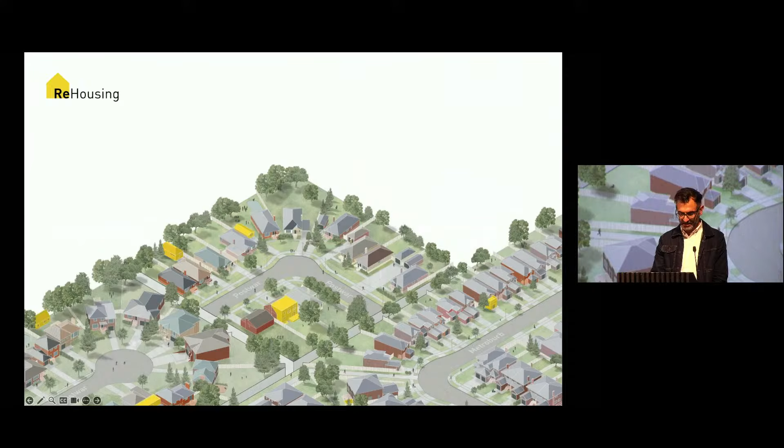As a kind of primer, zoning rules in North America are changing to allow new forms of multi-unit housing in single-family neighborhoods. As architects and urban designers, we were able to take advantage of these rules.

Our ability to assess property and steer our own small projects through design, approvals, and construction provided a starting point for a lot of the conversations we had when we were first getting going with this project. Specifically, the idea that as designers who were able to renovate our own basements, or think about buying a lot where they could do a small apartment or create their own multiplex condominium, we felt like this knowledge was something we'd be able to share with others—non-professionals seeking to do similar kinds of work.

This could range from homeowners adding a unit to improve affordability, to small builders and nonprofits growing their capacity for larger, more complex projects. The overarching goal is a belief that a more diverse building industry will yield a broader mix of housing better suited to the varied needs of local constituents.

Aesthetically, we're interested in how this expanded agency, a broader class of citizen developer, might lead to a more heterogeneous and fine-grained built environment, something Robert mentioned when introducing us. So this is a vision for a city region shaped by many small acts of building, though it will not be easily realized in North America, as here we are used to building big.

To understand why this is a challenge, it helps to look at where this culture of bigness comes from and how it impacts our capacity to build small.

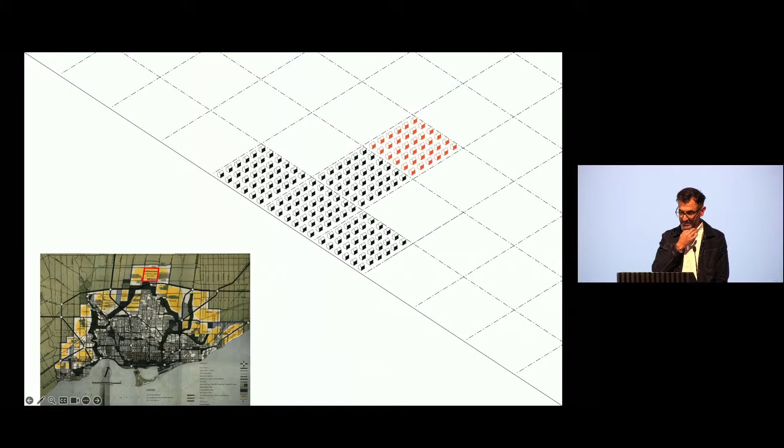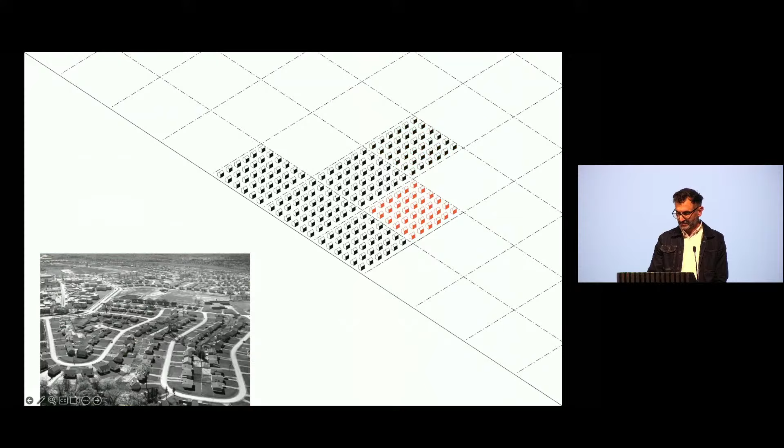These yellow blobs indicated are new block subdivisions to house upwards of 50,000 people. These subdivisions, or neighborhood units as they're called, are rubber-stamped across the urban region at an unprecedented scale over the 20th century, until we almost filled the region up.

This happens in spite of the fact that from about 1980 to 2006, as you're seeing here, there was a drastic lull in regional planning.

So in 2006, the effort to plan the region was rekindled, aligning with global trends, in an effort to reinvigorate and rethink the region at this time. One goal of this authority was to build out urban cores. This is the growth plan for the region that was developed in 2006.

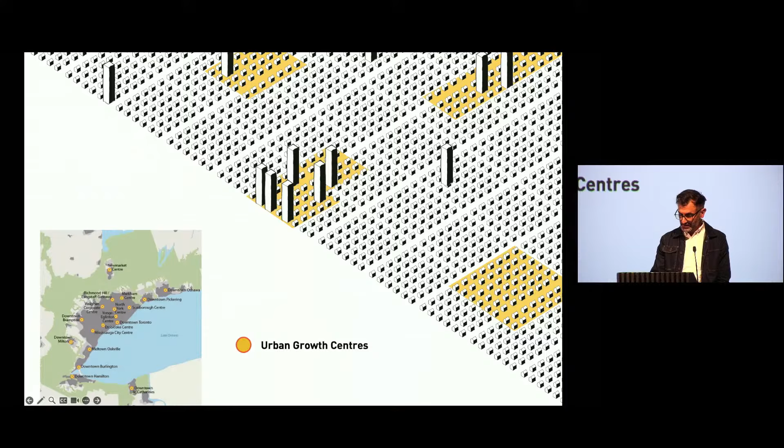The plan pushed new development into growth centers across the region's varied municipalities, including downtown cores and suburban centers. To my knowledge, the scale and enforceability of this planning regime is unmatched in North America.

I remember reaching out to my best friend, who's the boss of zoning in New York City, and I showed him what's happening in Toronto in the 2010s, and he was blown away at the scale of regional planning happening here. It got me thinking about how that affects how we build, and the attitude to making cities, and how distinct it was from any place I'd lived prior.

And to streamline this mode of construction at this big scale, approvals pathways, financial systems, and professional services are all geared for large-scale builders, of which Toronto has a comparatively few number compared to other cities. And it is within this context of bigness that ideas for building small emerged.

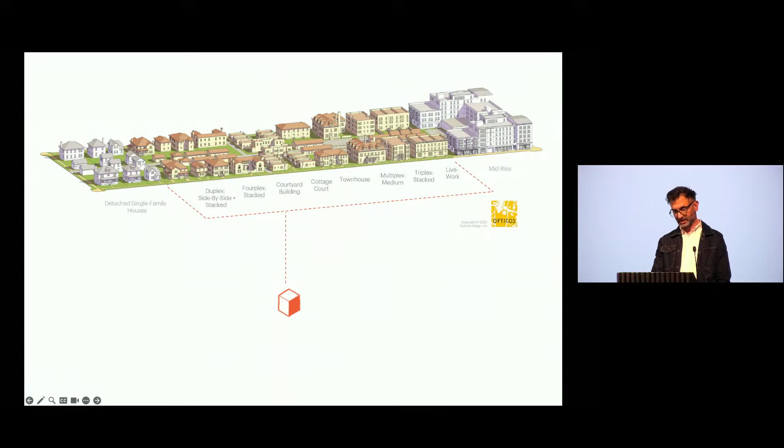In 2018, the city introduced a set of policies meant to open up single-family neighborhoods to multi-unit housing. Broadly speaking, the idea was that instead of continuing to build outward, we should fill in our existing single-family areas, which make up over 40% of the region's land supply. Advocates call this type of building the missing middle, small to mid-sized buildings that can fit on a single lot.

The idea has been widely influential, but uptake has been limited, and it's worth taking a moment to consider why. Viewed from the perspective of form or scale, the missing middle describes a type of housing that is in between low-rise single-family homes and high-rise towers. But a problem with this perspective is that it does not really reflect how we actually build.

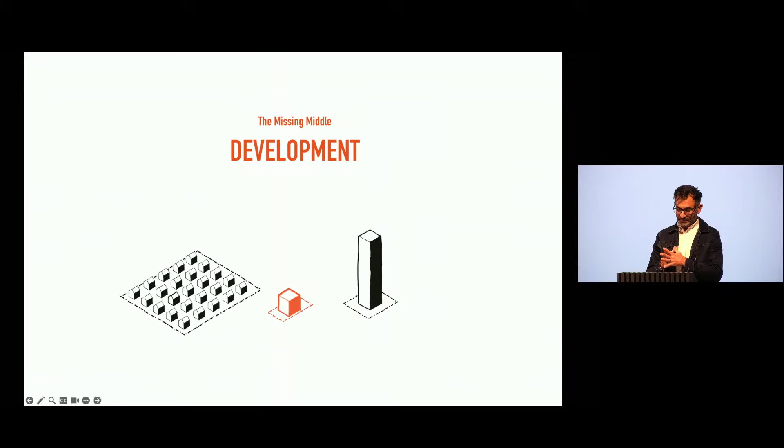One of the reasons I shared some of this history is to provide some context for this. We don't build single-family homes one at a time anymore. Rather, we build these vast subdivisions on one hand and towers on the other. And so when viewed from this perspective, this middle scale is not so much in the middle of our housing types, but rather exists in a kind of feasibility gap.

Bigger projects offer more value to people who finance, design, and build them. These efficiencies, referred to as economies of scale, encourage builders to build big, making it comparatively difficult in this context to build middle-scale infill housing and to realize the kind of ambitions of incremental infill that it promises.

So it is in this context, where both institutions and industry push housing to larger scales, that we believe it is important to rethink housing design if indeed we are interested in expanding the smaller to medium scale of our built form. And so I'll share a few ideas about what I think needs to be considered in order to do this.

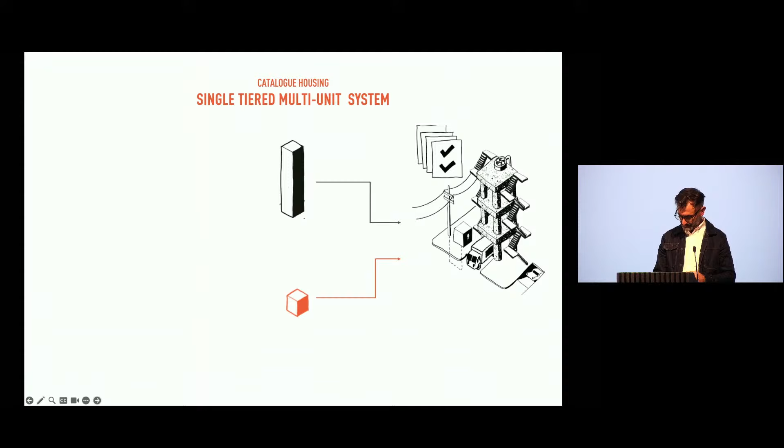One is that medium-sized housing is financed, approved, and built currently like larger projects. So from our perspective, we're currently researching the architectural characteristics of a multi-tiered housing system that provides discrete pathways — formal, technical, logistical, and regulatory — for small to medium-sized projects.

Another idea is to think in many instead of thinking in one. So how to think about buildings not as a singular object, but as a system or typological system of buildings. Our approach to this method is to identify the dimensional limits for basic buildings — the stair configurations, how the units are laid out — and then to align these with parcel widths.

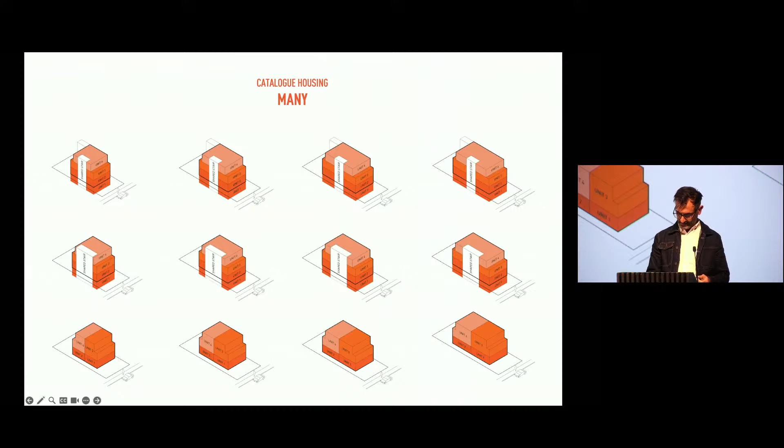And in doing so, focusing on how design as a system of many repeatable iterations can then propagate at large. So this is very much scalable, and supply and building more driven. It falls in line with some of the attitudes of how we're building these days.

A brief caveat to say that we're not speaking explicitly about affordability in this context. There's not an assumption that building more will solve that challenge, but we do think that building more is important.

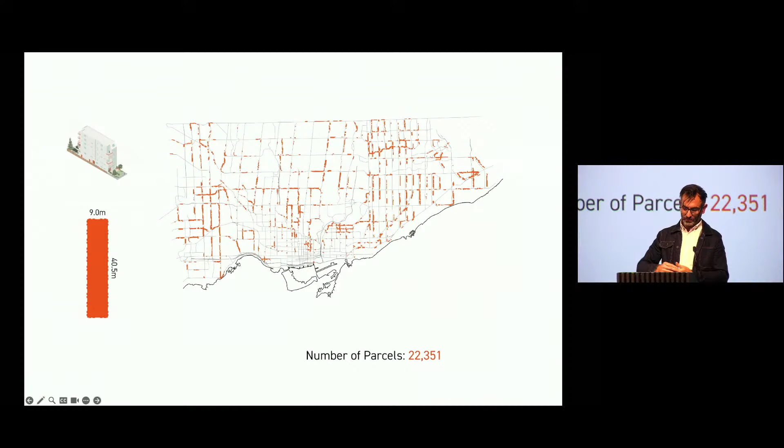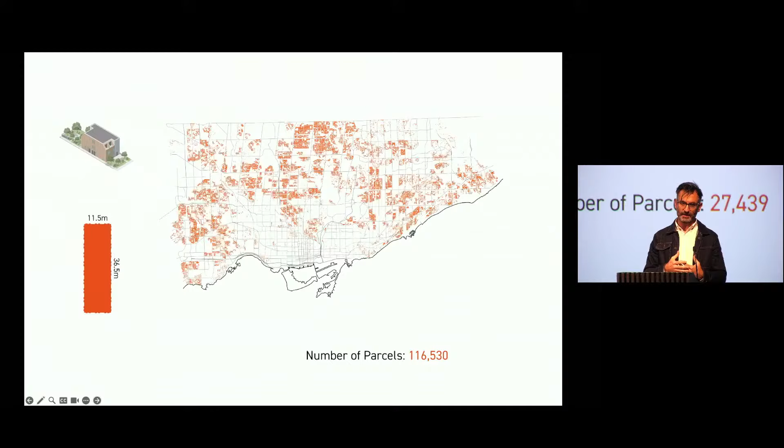So another aspect of this idea of repeatability is to use methods of morphology to map out parcel sizes and the urban structure across the region to understand where different types of buildings can fit. Sam's going to speak a good bit more about this in a second, and we'll revisit this slide to speak more about it.

So with these conditions established, we also work to make buildings that we think look nice. Here are a few examples of the scale that Robert mentioned, and again, Sam's going to speak to this in more detail. In sum, we're interested in such frameworks for housing production that can be deployed across a range of sites, making small, well-considered forms of housing easier to reproduce, adapt, and multiply in different contexts.

And so I'll hand it over to Sam.

Our approach to design research and catalog housing has evolved a lot over the last almost four years that we've been working together, in response to the changing guidelines in our cities, but also a lot of trial and error to try and navigate some of these complex ideas. From our original catalog, which outlined four ways to transform 13 common houses in Toronto from single family to four-unit multiplexes, our research has since expanded to include new build fourplexes, sixplexes, and most recently, small apartment buildings.

Our work on new build 4plexes began with the goal of understanding how the dimensions of a parcel impact the type and size of multiplex that you could build on a site. A key aspect of this work was understanding the impact of different stair configurations on the design and layout of multiplex units, whether a project has stacked townhouse-like units each with their own stair, two shared stairs, a scissor stair, or hopefully soon a single stair.

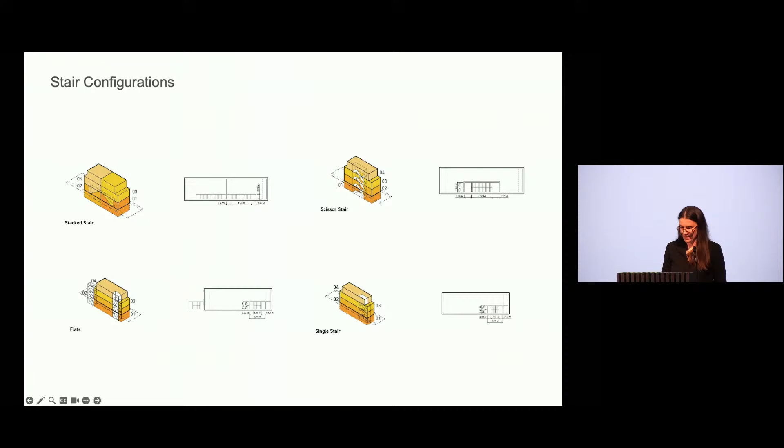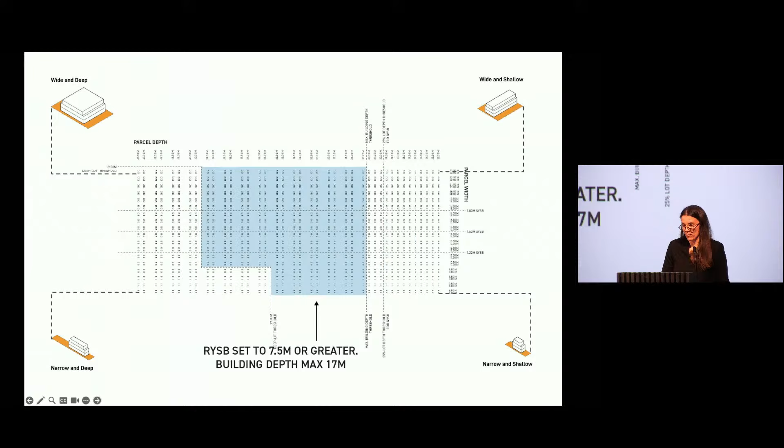Circulation plays a crucial role in organizing the internal space of a multiplex. It affects how units are accessed and how livable space is distributed, and different stair types and orientations work better on different lot sizes. We tested these configurations using a matrix consisting of 1,440 potential lot sizes categorized by width and depth in half-meter increments. This comprehensive grid enabled us to account for the variety of lot sizes found across Toronto's residential neighborhoods.

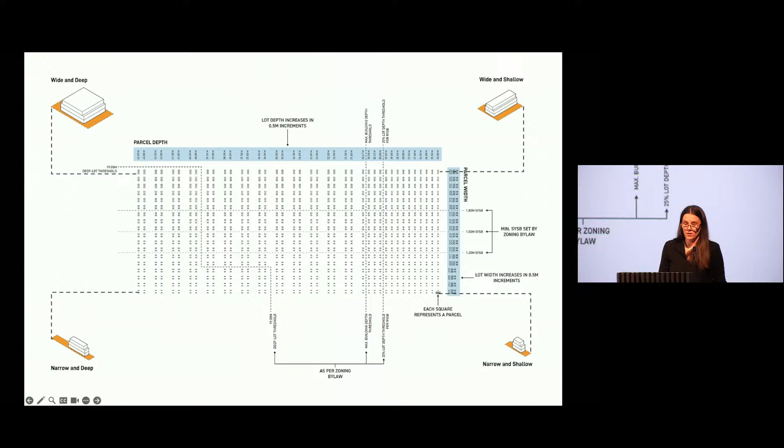Each potential lot size on the matrix was mapped with relevant zoning regulations, including side yard setbacks, rear yard setbacks, maximum building depth, height, and other requirements, in order to determine a maximum building envelope for each. From here, we mapped diagrammatic floor plates of each stair configuration to determine performance boundaries based on unit area.

This mapping established a foundational understanding of which parcels could support different types of fourplexes. The different shades of blue highlight the thresholds where a floor plate is large enough to accommodate different unit sizes, with the bottom showing studio units and the lightest at the top showing four bedrooms.

This process was repeated for different configurations of each stair type to estimate the lot dimensions most compatible with each type. Luckily, our research assistants were more than willing to do this, including taking into account lot coverage percentages, and so they drew diagrams of thousands of multiplexes.

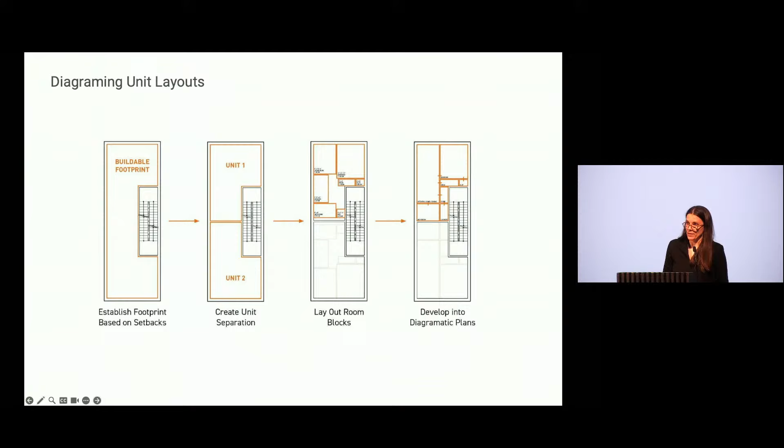From this stage, we transitioned from basic footprints to more detailed, though still high-level diagrams, testing how available space could be used to create functional dwelling units while accommodating realistic room sizes and considerations of circulation.

Again, we identified thresholds, points where small changes in the size of the lot or stair configuration could lead to significant impacts on the overall configuration of the plan and the size of units it could support.

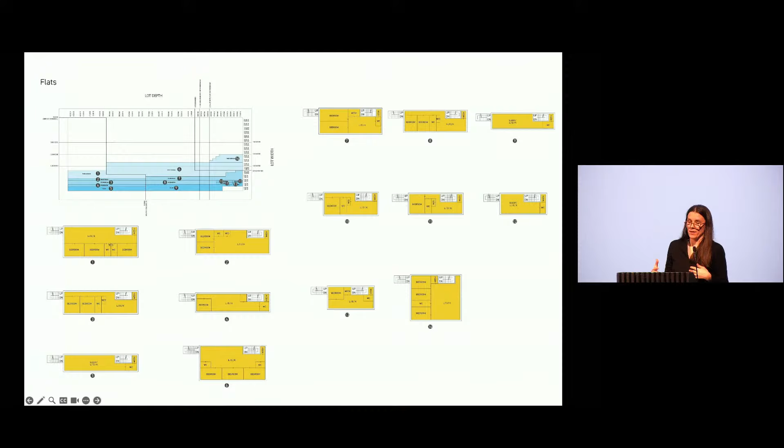Again, here, each shade of blue represents a zone of lot dimensions with a functionally similar layout. For example, a transition might occur when you see a change where the site becomes wide enough that two bedrooms can be accommodated at the front instead of just one.

It was really important for us to demonstrate that these plan diagrams could translate into real buildings, so we selected representative lots from across the city and developed more detailed architectural drawings for each stair configuration. This work was under development as we were considering the viability of pre-approval and in discussions with the city about how complex that is and how to respond to the variety of lot conditions and opportunities presented by the urban fabric.

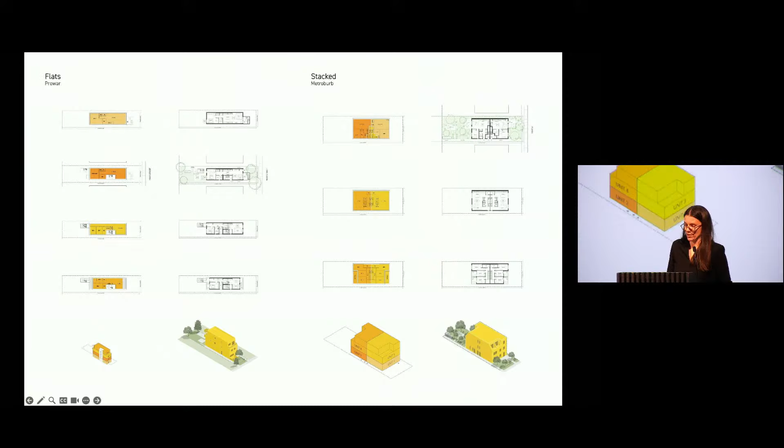Following the passing of the multiplex bylaw, which allowed 4plexes all across the city, City Council requested that the planners consider 6-unit multiplexes within the same envelope. So we were commissioned by the City of Toronto to undertake a study to look at the viability of 6plexes within Ward 23, Scarborough North.

This time, looking to establish thresholds of viability, we took a different approach. Rather than starting with the lot dimensions and understanding what was possible on each lot, which was impossible given the time frame this time, we started with the building. Using the envelope design outlined by the multiplex zoning code and sets of minimum standards that we developed in collaboration with the city, we developed a catalog of diagrammatic configurations for 6plexes at 2-meter wide intervals.

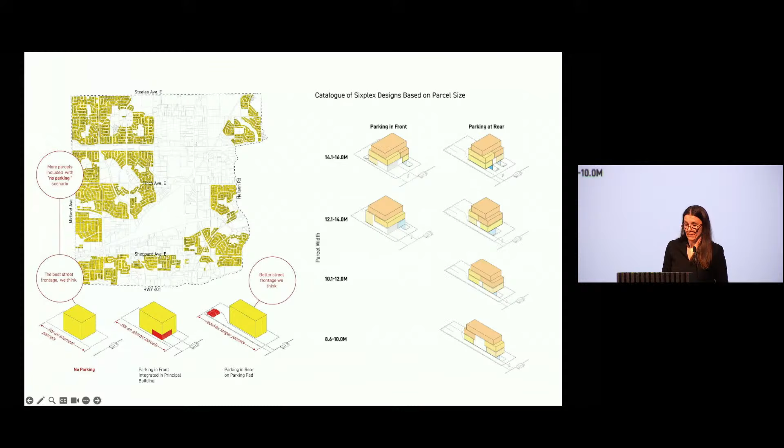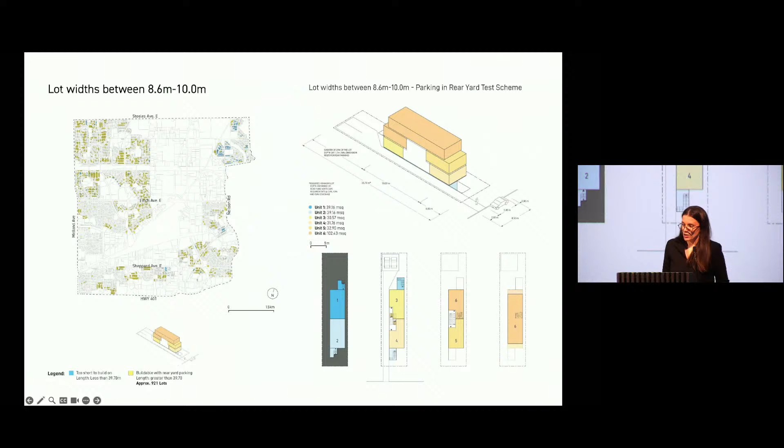We considered three types of schemes: no parking, parking with an integrated garage, and parking at the rear of the lot. These factors around parking were added to the dimensions of the minimum 6plex to determine minimum lot sizes in each case. Then, using GIS, we examined the parcel fabric in the ward, identifying varying increments to look at which lots might be able to accommodate these different scales of building.

As the lot gets wider, less depth is required to meet minimum unit sizes, and configurations with parking in the rear required deeper lots than ones with integrated garages.

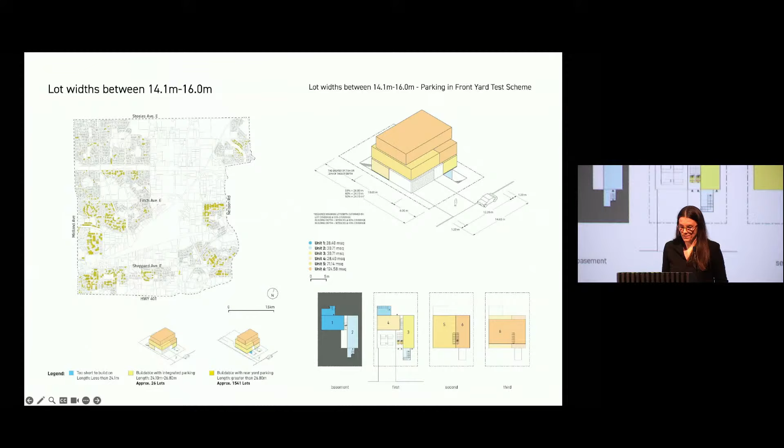Finally, as a last part, we selected a series of case studies from these types and identified sample lots across the ward to test these assumptions in more detail, integrating considerations like lot coverage, soft landscape, and circulation. The lessons from these detailed drawings were fed back into our mapping exercise to refine the thresholds of viability. Ultimately, we determined that approximately 60% of the lots in Ward 23 were large enough to accommodate a 6-plex, and 40% could accommodate a 6-plex with 2 parking spots.

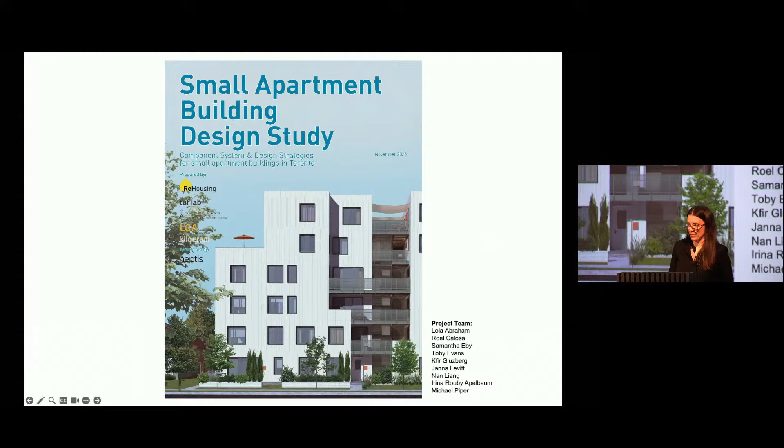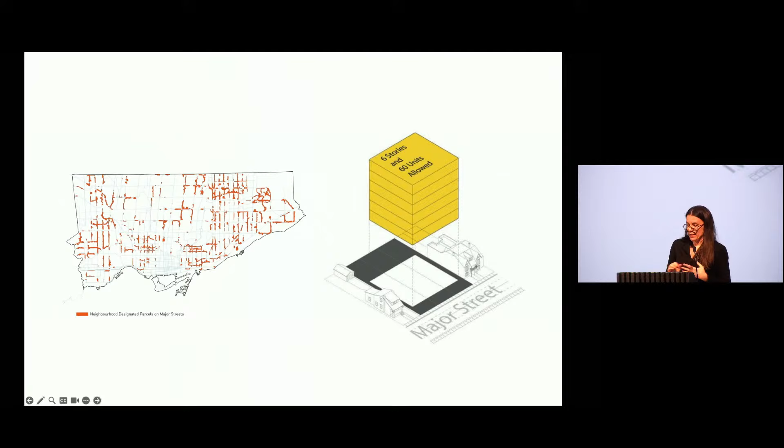Most recently, in response to new legislation allowing increased density along major streets, we expanded our research to include small apartment buildings. This work was developed in collaboration with Kilogram Studio. The new bylaw amendment allows the assembly of up to 3 lots and permits multi-unit residential buildings up to 6 stories and 60 units along designated corridors, introducing mid-rise forms into areas previously limited to low-rise development.

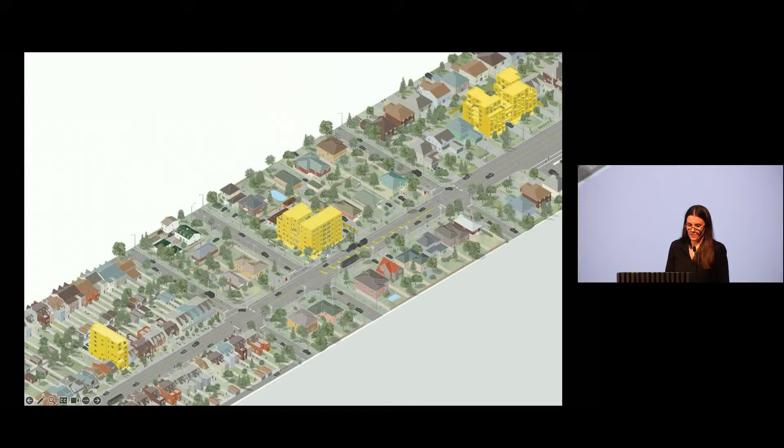These major streets are typically characterized by wider right-of-ways, higher traffic volumes, and greater access to transit infrastructure, making them natural sites for intensification in the city. But they also extend across the city fabric through areas where the urban fabric and lot structure vary significantly depending on where and when they were developed. This presented a new opportunity to further explore the relationship between parcel and building dimensions.

There's no single template for this type of development, but we were interested in whether a component-based system could serve as a conceptual design tool, one that allowed for the rapid testing of small apartment building iterations at an early stage. Rather than beginning with the lot, like we did with the 4-plexes, or the footprint, as we did with the 6-plexes, this time we began at the unit scale.

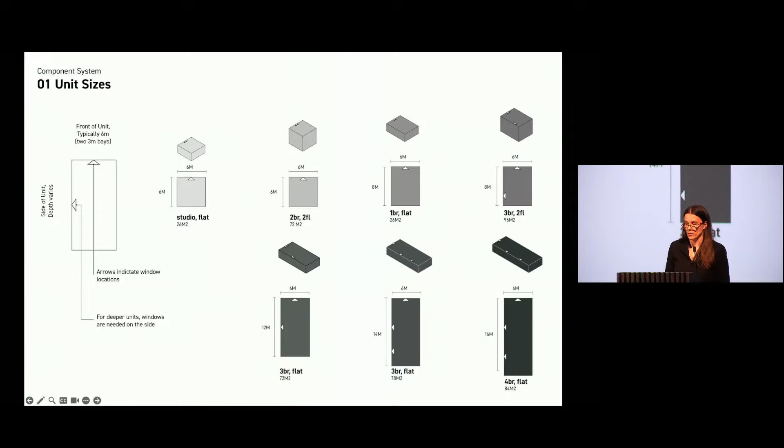The dimensions of unit components take into account ideal room dimensions, structural systems, and unit depths to consider access to natural light and spatial arrangements. From there, we developed a system of unit clusters that could be combined in different configurations to generate a range of mix of units and overall building forms.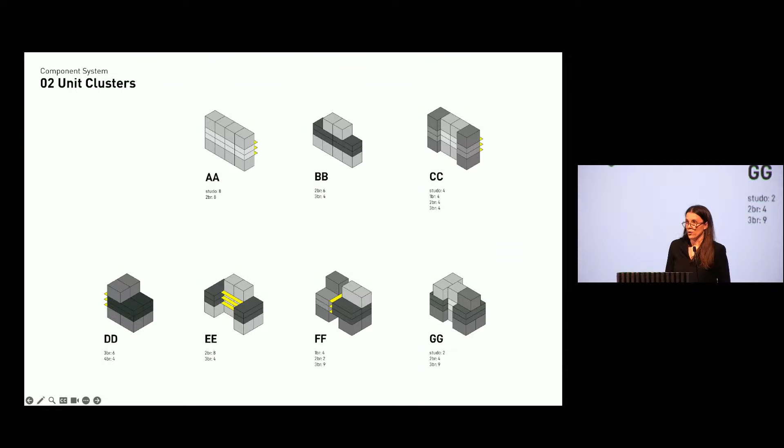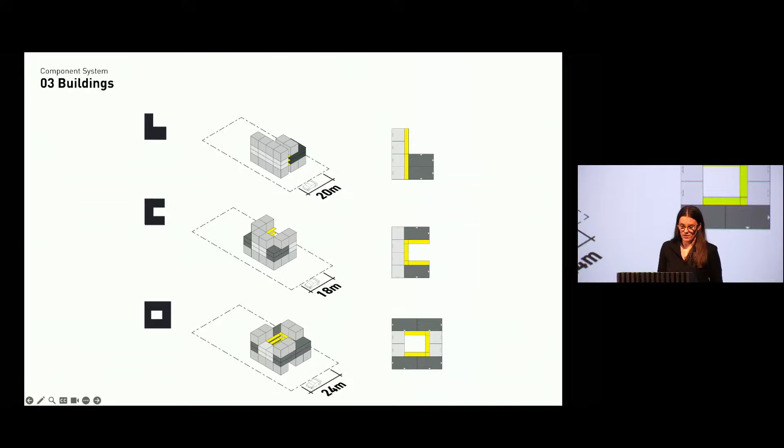These clusters could then be assembled into larger building types that could adapt to varying site conditions. We tested different shapes and circulation systems and documented how each responded to different parcel configurations in urban contexts. This resulted in building forms roughly corresponding to 7 letters: I, L, C, H, U, M, and O. Each letter form represents a different approach to massing and circulation and is suited to different lots in size, condition, and context, each offering different opportunities and constraints.

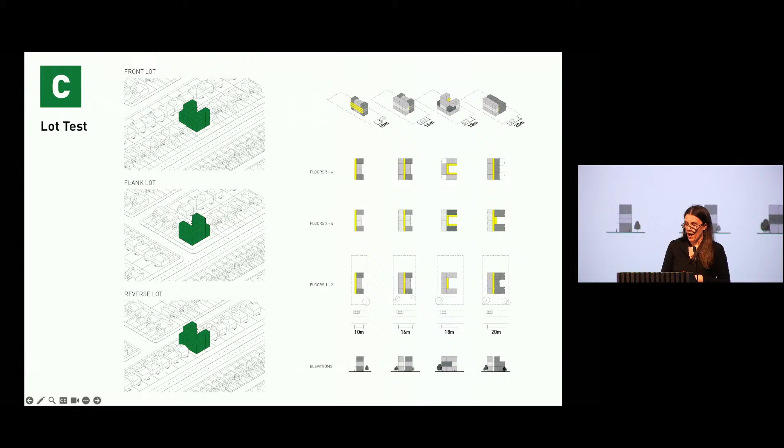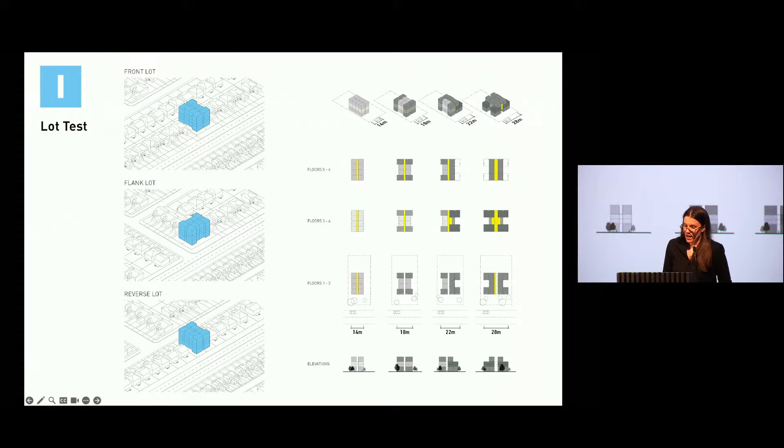Lots along major streets generally fall into 3 categories: front lots, where the entire frontage on the street faces the major street; flanking lots, which occur at a corner between a major street and a minor corridor; and reverse lots, where the major street was historically the rear yard of a single-family house. We tested each of these shapes to see how they would engage differently with the street, the neighborhood, and the public realm.

To test these ideas further, we developed 3 representative case studies that looked at different shapes, different levels of lot assembly, and different neighborhoods, and then applied them to real sites and contexts.

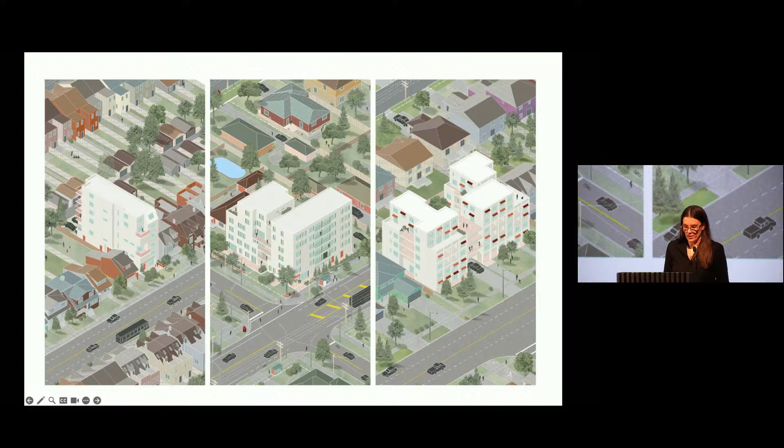Our first case study is the I-shaped building, a small apartment situated on a single pre-war laneway lot with a semi-detached condition. Located in a downtown neighborhood, the site benefits from proximity to the city core and public transit and has secondary access via the laneway. Because of this, we minimized parking on site to just 2 units.

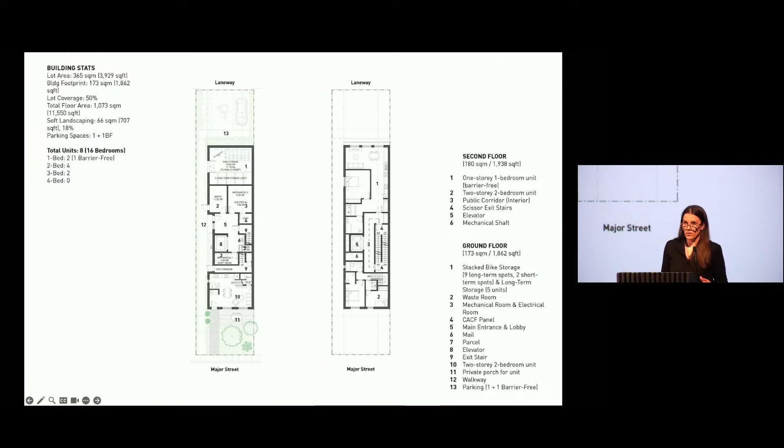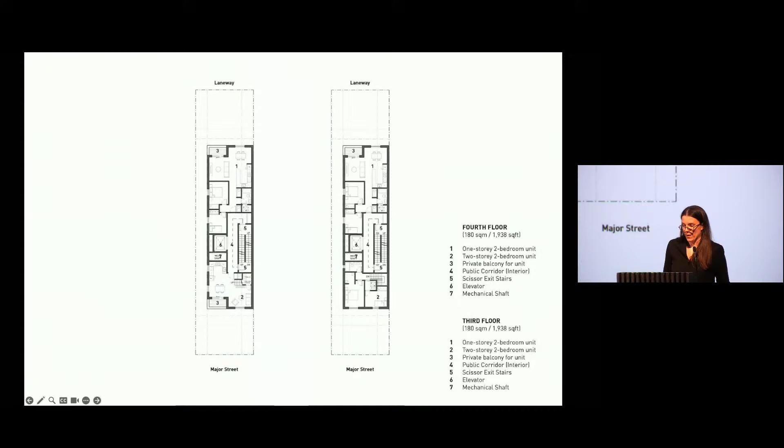The front of the building contains 3 two-story units, with the rear, which includes amenities on the ground floor, 3 flats, and 1 additional two-story unit. Although the building reaches 6 stories, it incorporates a sloped roof and inset balconies that break down the massing.

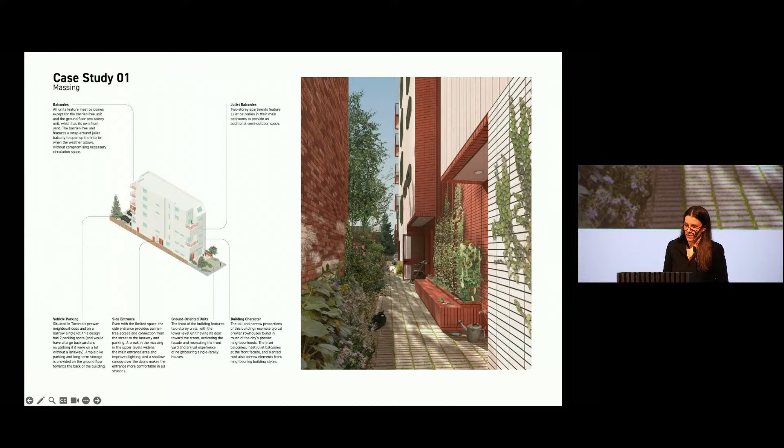The ground floor unit fronts directly onto the street with its own porch and yard to mimic the rhythm of the neighboring houses, and a side path provides access to upper units and space for services. The compact footprint required a careful combination of single and two-story apartments to achieve a desired unit mix, incorporate a barrier-free unit, and provide outdoor space for every resident.

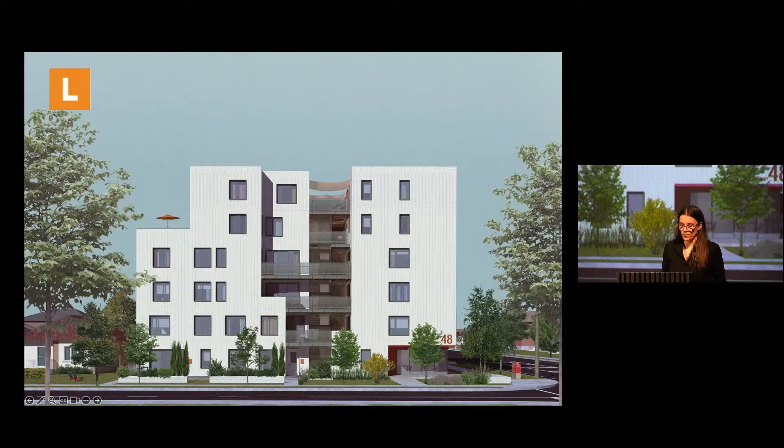The second case study is on an assembly of 2 lots on a flanking site in a post-war neighborhood, using an L-shaped building where one side faces the major street and the other faces a lower residential street. Given the larger parcel size in this area, this configuration was able to accommodate 26 units while leaving generous open space at the rear for parking, landscape, and daylight access.

The L-shaped building is made up of 2 distinct clusters. The cluster facing the major street contains ground floor amenities and a more urban facade with stacked units. The cluster facing the residential street is composed of two-story townhouse-style units on the ground and 5th floors, each with direct access to backyards or rooftop terraces.

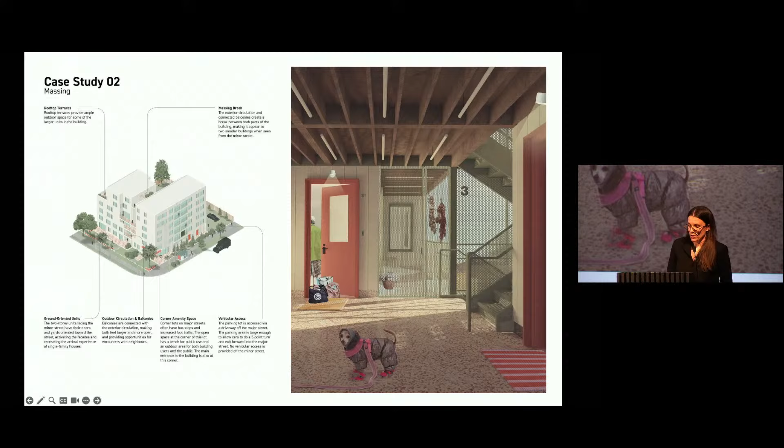An open-air circulation system links the two clusters, providing natural light and ventilation, reducing conditioned space, and offering informal gathering areas for residents. This combination of unit types and outdoor spaces seeks to blend the best aspects of apartment living, shared utilities, and a sense of community with the benefits of a single-family house, including outdoor access and privacy.

The third case study is the largest lot and explores a three-lot U-shaped building on a front-facing parcel in a Metroburb neighborhood. Metroburb is typically defined as after the post-war period, so post-1967 to the early 90s. The building fronts directly onto a major street, and the wider frontage of three assembled lots accommodated 30 units around a central courtyard. The building's major street side integrates amenity space to activate the frontage, with two-story townhouse-style units positioned along one edge to transition towards the adjacent single-family homes.

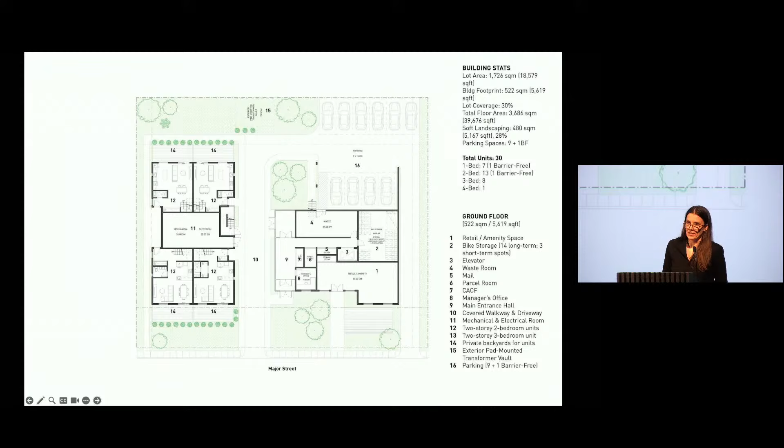The opposite wing contains communal spaces and building services, and parking is placed at the rear to maintain a continuous and animated street. We see the scale of all of these buildings as an opportunity to introduce unit types that are largely absent in the current market.

Particularly, we had an interest in two-story apartments that might support families, multi-generational living, or live-work units. The design of all three of these buildings provides a mix of larger units with small, compact ones.

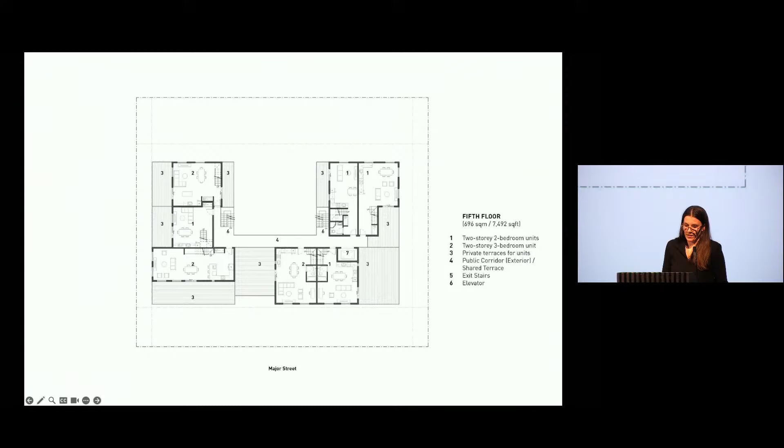Again, we were experimenting with external circulation to connect the upper floors, with units on levels three and four accessed via open-air corridors that double as communal terraces. And the upper level is accessed through a shared rooftop terrace.

The two clusters form a break in the massing that aims to reduce the perceived scale of the building from the street, allowing it to read as two smaller volumes. Together, the range of outdoor spaces—private balconies, semi-private terraces, backyards, and shared courtyards—works to create a rich network of outdoor living spaces.

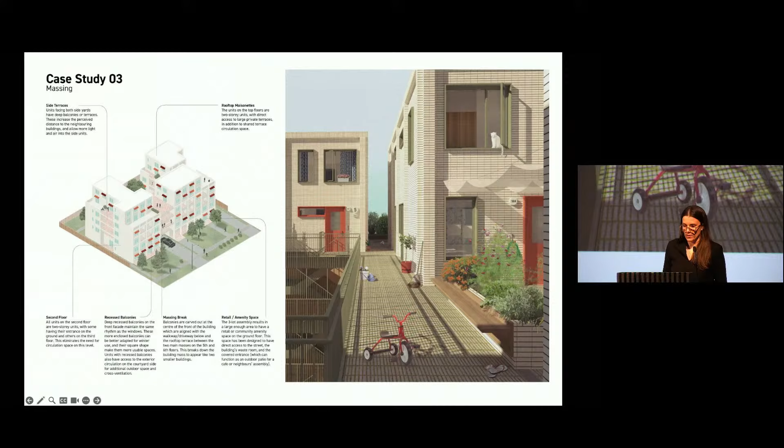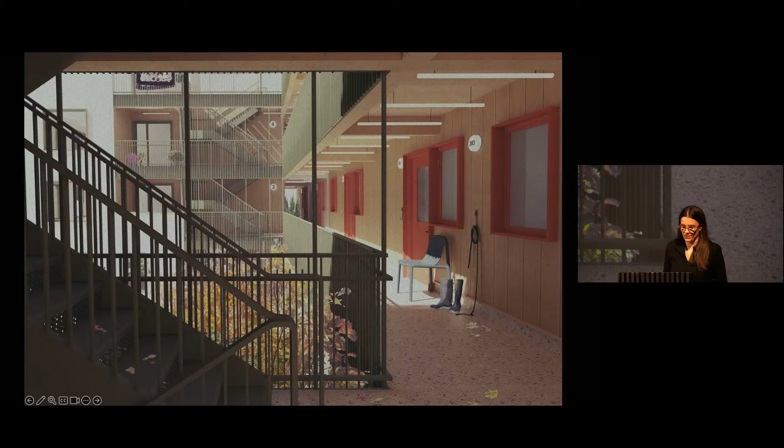Across these examples, we hope you can see a similar set of components that can be combined to produce a family of buildings that adapt to the context while maintaining a consistent logic in their structure and organization. From the fourplex to the sixplex to the small apartment, our research has worked to highlight both the potential and challenges of building small.

We explore how evolving policy frameworks can translate into design opportunities, and how design research in turn can inform policy. While the design of a single small building on a small site may seem incremental or insignificant, when understood as part of a replicable framework, their collective impact becomes more significant.

At ReHousing, we're constantly trying to navigate these two scales, the urban and the human, linking technical and quantitative analysis with the lived experience of housing. And I'm going to pass it to Janna.

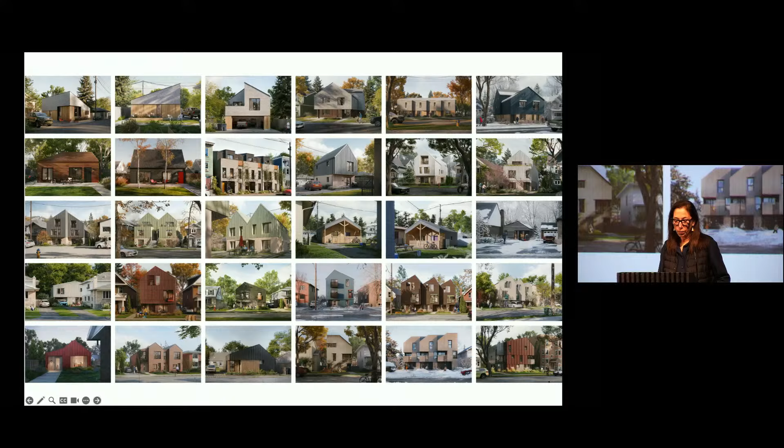As Michael said, catalog housing is both a system and a scalable and repeatable tool. These properties make it ideal for supplying one type of housing solution to the market. It doesn't preclude architects participating—rather, I believe it actually expands pathways for contributing to design culture.

I think it's about thinking about architecture more expansively. I see it as akin to the conversations we all have about prefab housing, and how there's a kind of distinction made between prefab and catalog housing—I actually think that distinction is a false argument. It's only one part of a broad spectrum approach to housing design, and you can see in the images here that catalog housing has been around for a long time, but primarily for single-family homes.

This is the first national catalog issued by the newly created CMHC in 1947. It was initiated to address a housing crisis created primarily by World War II vets returning home and opting to locate in urban centers. It's all single-family residential.

In 1947, you went to a Government of Canada bookstore or ordered one through the mail. The cost was $10. What's fascinating is that $10 was actually part of your down payment—as an end user, you could put that towards your catalog house. And finally, it allowed you access to federal financing and a mortgage through the CMHC.

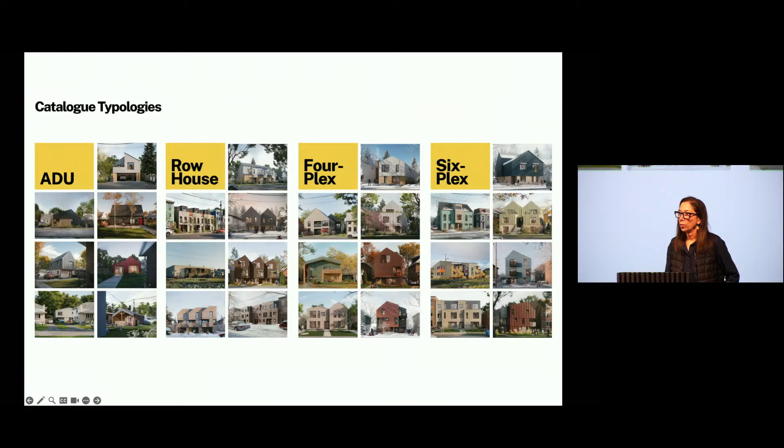As we know, there's not one voice speaking for all of Canada. It's a sticky, disparate mass with diverse views, languages, economies, and environments. Almost immediately on starting the work, our hunch about the need for a national team was validated. It was to identify, synthesize, and systematize the key design drivers across the country and to construct the national framework in which each region could thrive.

To address this, we in HAF Climate established a national rubric. Each region identified a representative climate zone for the purpose of modeling and calculating sustainability and structural design work for the typologies. Each package of drawings has a color coding that identifies the information the end user needs to validate and to calculate variations up or down from that set point.

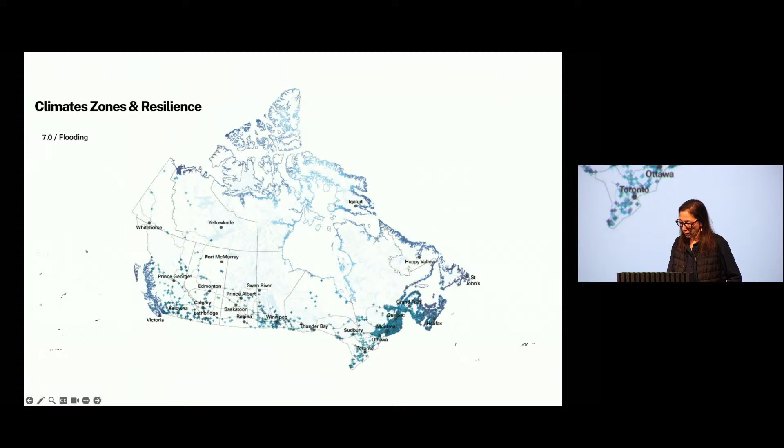Following this, the guide provides specific tips, tricks, and strategies from site design to building systems that the end user can selectively enact in their catalog house. This system of a national frame and a regional response became one of the primary design process tools.

If climate was the gateway issue, then energy sources, specifically fossil fuels, was like the difficult child in the room. Currently, there's no uniformity in the country regarding the energy sources for heating and cooling.

The discussions we had about fossil fuels and developing a coherent and progressive national approach revealed significant regional differences and difficulties, various political perspectives, and of course a lot of existential angst. To complicate this, none of the aggregated regions were uniform in their use of fuel sources.

However, all 7 regions shared a common goal to advocate for better energy stewardship and performance. With CMHC and HAF Climate, we set up a national performance target, with Tier 3 being the minimum design set point. BC has its own step-up performance code that I would say establishes them as a leader in this regard.

Regionally, each set of drawings includes anywhere from 2 to 4 mechanical design solutions, along with energy models for each of them. This enables the end user to learn about and hopefully opt for a better performing house. The climate resilience guide I just spoke about is useful here too, more as a knowledge mobilization tool or plain English guide for end users on how to minimize the use of fossil fuels and carbon.

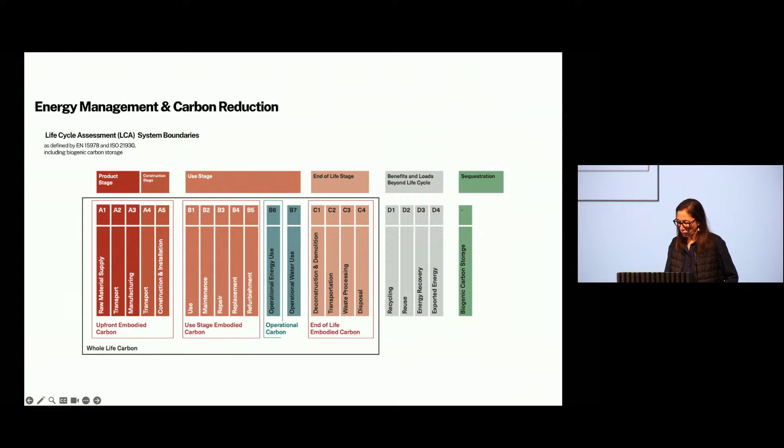Determining the lot dimensions for each region across the country was a logistical and technological odyssey. Each region needed 2 prototypical sites to accommodate a design for both a wide and a narrow version of each typology. Urban Strategies scanned all of the significant municipalities in every single region across the country to identify both the best reference cities and also average lot sizes.

And like many of the things, because this is a national catalog and a public catalog, many of these decisions had to be able to be litigated by a public who have many thoughts about many things and have a lot of interest in expressing them. So we had to make sure we were on sound footing.

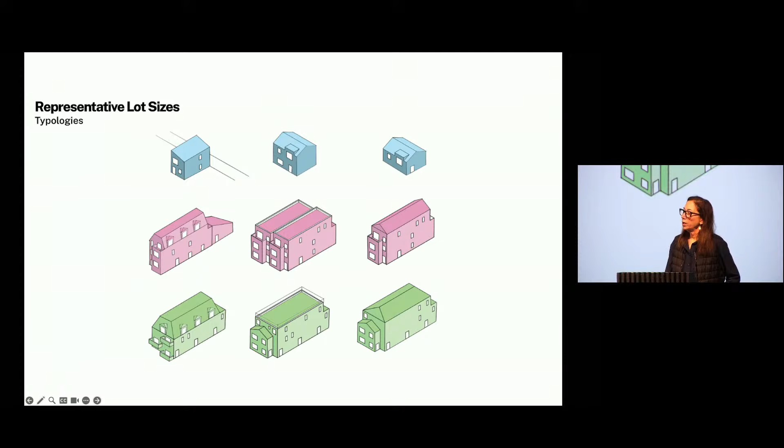They also assisted each team with a toolbox of strategies to address the myriad of other site and building issues that needed to be considered when negotiating the relationship between zoning and codes on a fictitious site.

Accessibility and aging in place was another national design driver common across the country. BC, as with energy, is a leader on this issue, with a bespoke set of standards. All other regions referenced their provincial code or the NBC. CMHC also requested we use a more recent standard, CSA B652-23, to create an enhanced accessible design option. This standard runs much deeper than code requirements, and all regions struggled with implementation. So we developed a series of design blocks that teams dropped into their plans to reduce challenges and ensure consistent application across the country. Almost all designs have at least one accessible-ready and one enhanced accessibility unit, unless the typology is too narrow or the units are two stories.

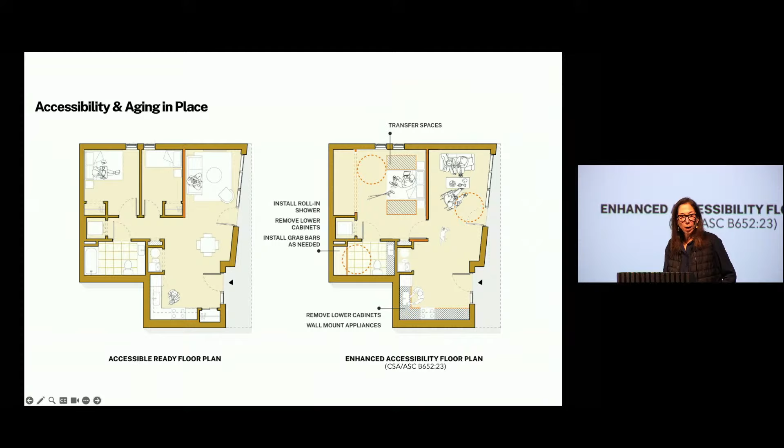Developing the renderings was an act of co-creation between the regional and national teams, CMHC, and Brandon Bergen's team from Office in Search Of. Conceptually, it started as one enormous Miro board that facilitated a national conversation about how we represent a catalog architecture. Months of digital conversations and notes, aimed at identifying the specificity of each region, broke down into many Miro boards, ultimately becoming one board per region: 50 designs with 50 different environments, represented by one hand to communicate both the tangible and intangible national design vision.

Many great exchanges took place over the course of working up the renderings. The pace of production on the catalog was extremely fast, and we were only able to get together in one place in Ottawa for 3 days of exchanging ideas and trying to get to know each other as much as we could. So the relative looseness of the rendering process became a way we started to learn more about the personalities and perspectives of each team, as we left digital post-it notes, memes, and other bits and bobs on the Miro boards. In retrospect, it was a shame we didn't get to do more of this, because investing more of the personalities of the teams could have translated into more regional distinction. But as I said, the catalog was done quite quickly.

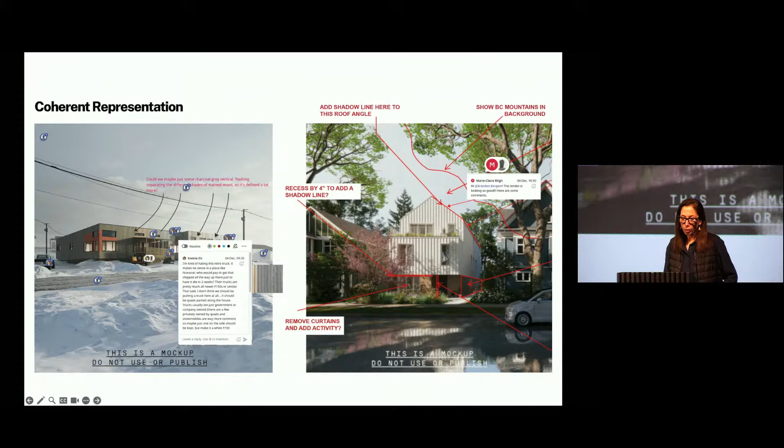So for non-professionals looking to add units to a home, it's often difficult to know where to start. There's a maze of rules, site constraints, and practical considerations that determine what can be built on any given lot. To illustrate this challenge, I'll focus on one set of rules particularly, which is zoning.

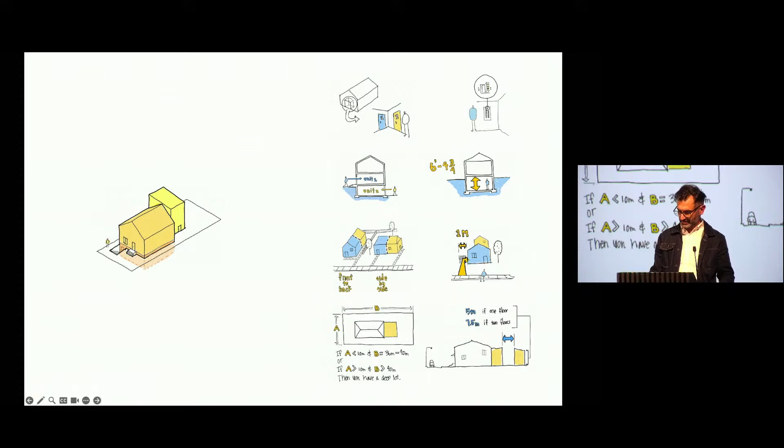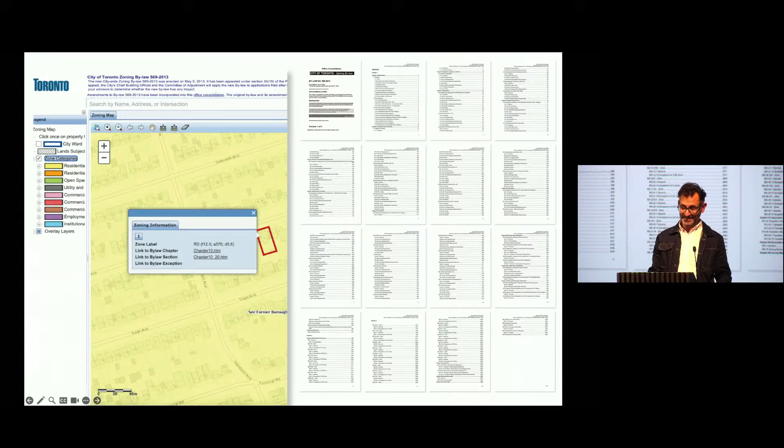Here's Toronto's zoning map. You zoom in, you click on a lot, and it pulls up this—well, it doesn't actually pull this up, but this is what it references: the bylaw. And this is actually not the bylaw, it's the table of contents to the bylaw, of which there are 3,092 pages.

What is a citizen developer to do? Oh, I was waiting for that question—we'll get there later. No, I mean, it's interesting, actually, so I'll try not to segue too much. There isn't really a dedicated service for providing homeowners a high-level study at this scale, and it's a kind of gap we were seeking to fill. We do send folks to architects, so we'll get to that, but it's a really interesting question we wrestled over quite a bit. The comment was hire an architect, by the way.

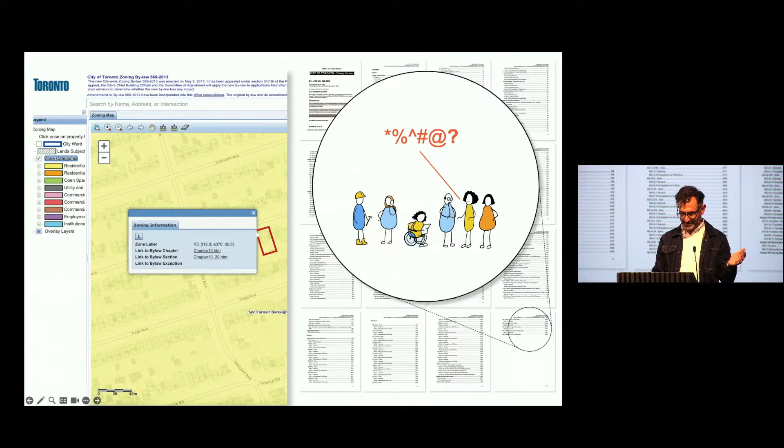So naturally, this can seem daunting. To make the process easier—and I'm fast-tracking a whole lot of other stuff that went into developing the platform, by the way—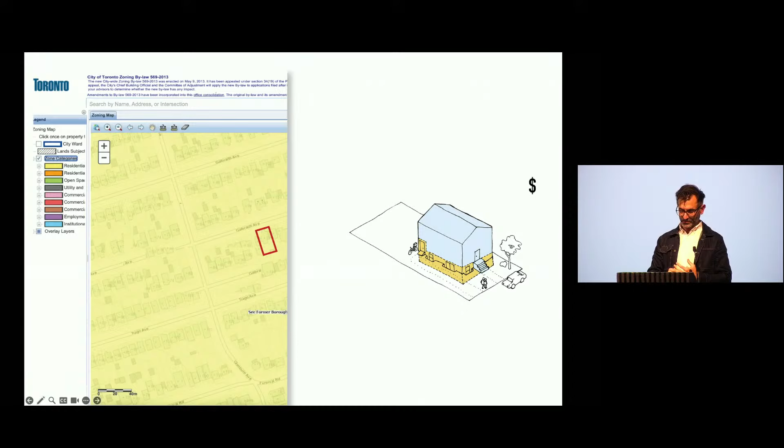Underlying this is just piles of data and information that Sam, along with others, have been assembling. But at the end of the day, to make the process easier, all of this data and information we've synthesized into a series of easy to understand design schemes that combine zoning data, practical information, and building code concerns, presented in a way that's hopefully easy to understand.

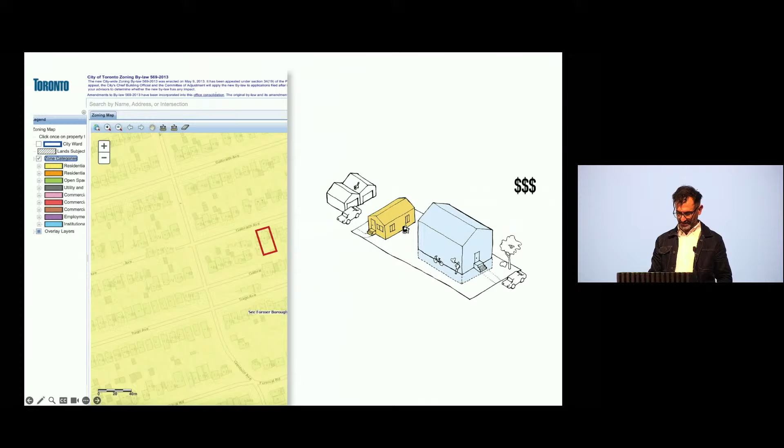And so this is the platform that we're going to share. Due to a slight technical difficulty, I'm going to... sorry, the transition was a little awkward.

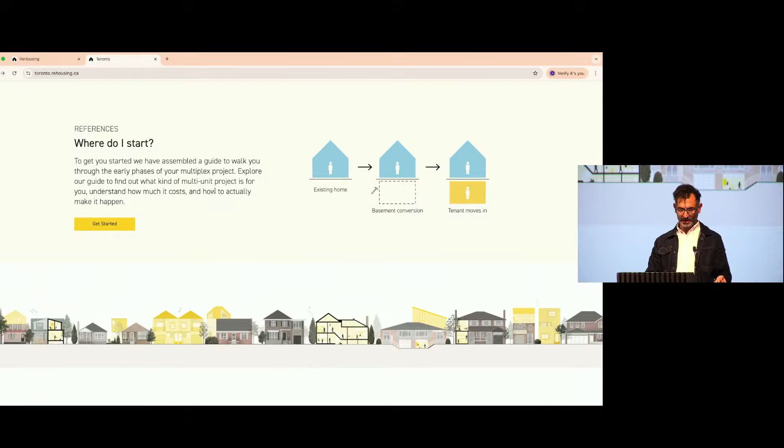In any case, here's our platform. It has on the main page a series of elements such as a design catalog that you can find on our website currently, and a guide about where to start. I'm not going to go through all of those.

I'm going to skip to the interactive tools that we've been developing. There are two parts: one is a property analysis tool that assesses properties, which is the kind of blinking images that I shared, and the other is a quick budget tool that provides cost analysis for them.

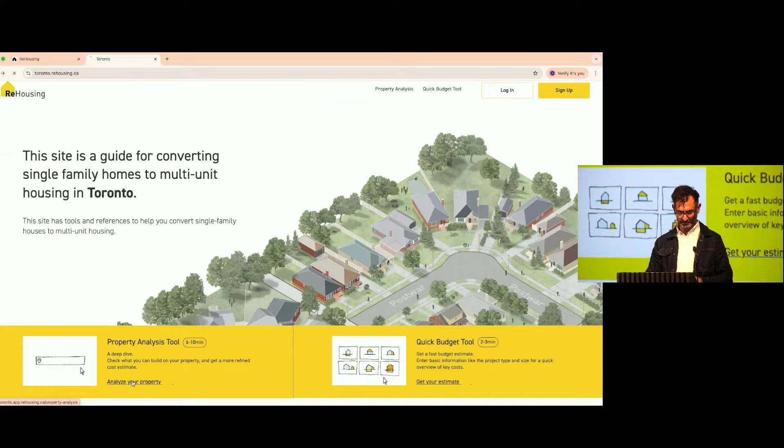Working with MIT, we generated a database that embeds zoning data into the actual parcels. Right now they're not correlated directly, and because of how Ontario is, you can't actually access property data easily—that's another conversation. You can search, and up comes the information about it.

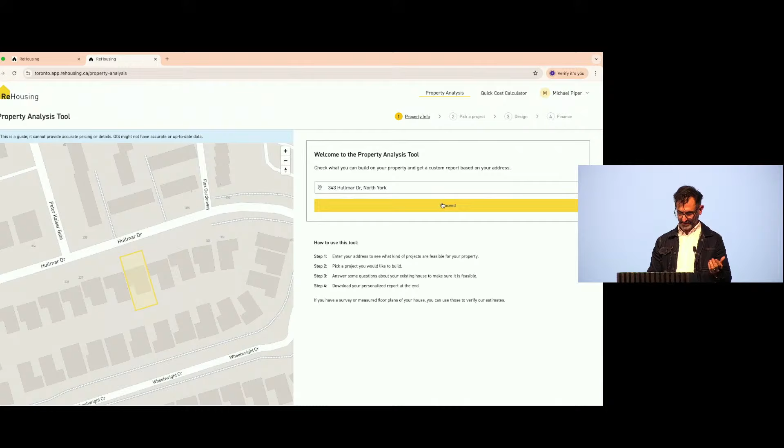So here's the data that's embedded into what we have in our database. But again, I have a little bit of an axe to grind here—because we can't get access to other forms of data, we ask these simple questions.

How many floors do you have? Is there a basement? Do you have a garage? These become a way of filtering through the design scenarios that we will eventually provide.

Once you answer these questions, you're able to see what types of projects are going to work potentially on your lot. To give folks an idea, not just yes or no, but a sense of what may be possible, they're graded from likely to work to more complicated.

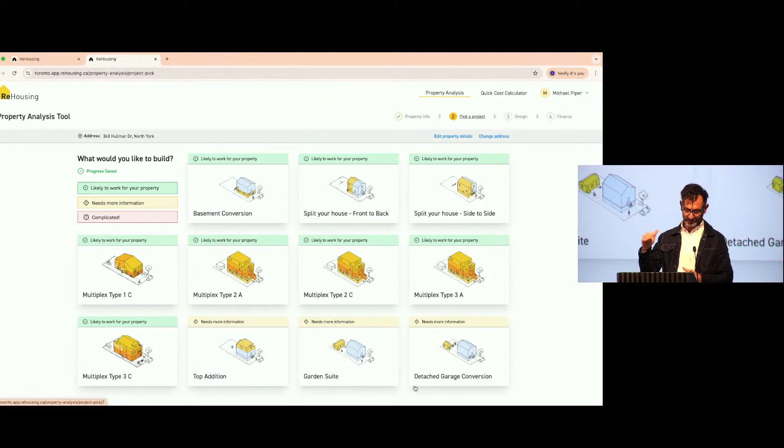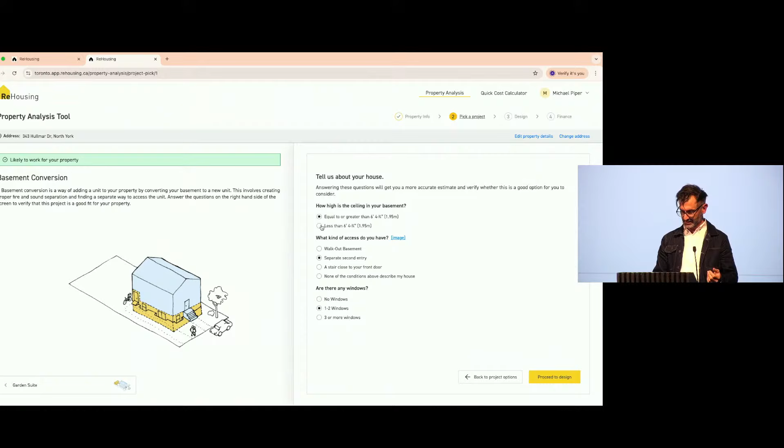When you click through these projects, there's another series of questions that we ask. For example, if your basement has a ceiling less than 6'4", it flags as complicated and informs you to speak to an architect and a builder about maybe the need for underpinning your basement.

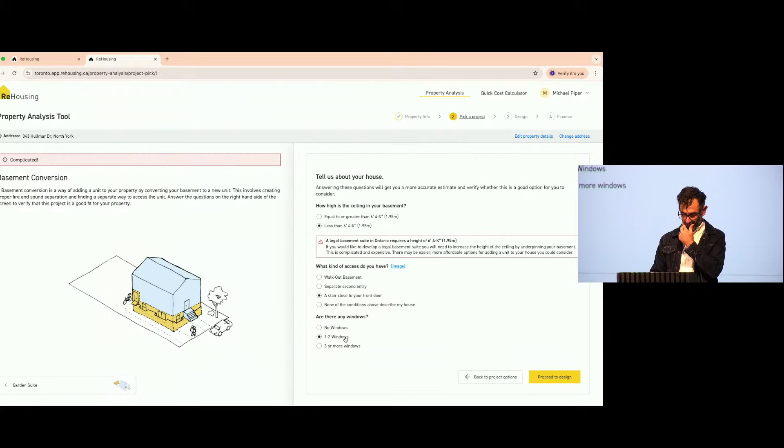Other questions such as access, stairway circulation, or windows also help filter these ideas. There are other scenarios you can go through, of course, and I'm not going to cover all of them, but I'll note that one part currently under development is the new construction piece.

If you remember the map that Sam shared—the blue one with the flickering lights and different building types—we developed that in order to build a matrix of these designs that would then be embedded into the system. So if you click on a parcel, it tells you which of these fit on your lot.

We've since revised that approach—it didn't turn out to be the smartest—but in any case, you can click through and see different options, both new builds or the renovation series. So I'm going to go back to the basement... oh no.

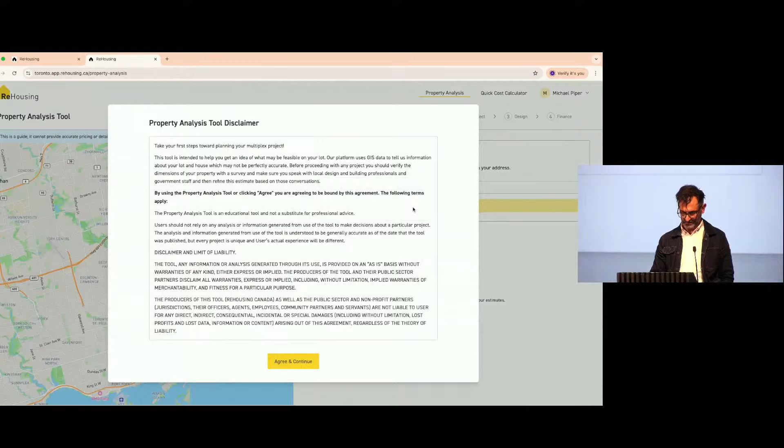I know a fast way around this. So projects are saved, and you're able to continue your assessment of the project.

After you answer questions, you can go to a design phase where you can change the floor area. The system warns you if you've exceeded the capacity for the floor plate of your building. You can specify your building type, how many bedrooms, how many bathrooms you may want, and identify a cost threshold for your project.

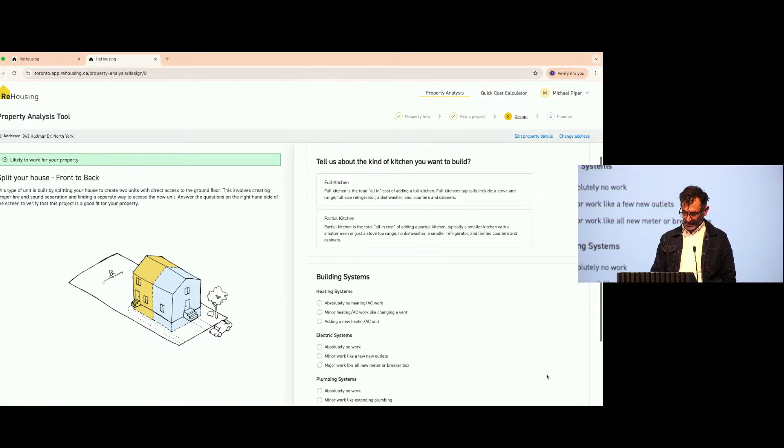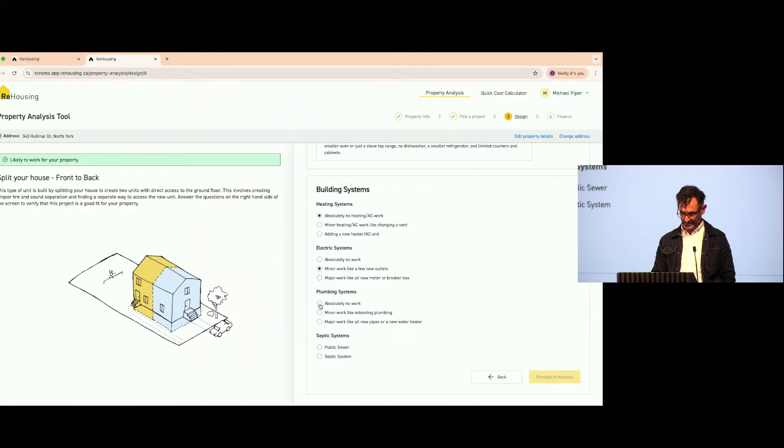Identify what kind of kitchen you need and other infrastructural or servicing needs—heating, what type of electrical system, plumbing needs. No septic systems in Toronto.

From that, we worked with a group in California who developed a costing tool, and we've adapted it to the Toronto context. This is mostly based on per square foot cost, but there are nuances in how the cost is calculated. You have here the development cost overall, hard and soft costs, and monthly costs that are similarly calculated.

You can see what your return on investment will be, and the estimated increase in value to your home. Then you can enter variables such as your down payment or cash investment in the project, the interest rate for a loan you may have, the amount of rent you can charge, the average stay for how long your tenant will be with you, et cetera.

So I think the most useful part of the tool is its capacity to generate a report. This responds to the 'go see an architect' question we mentioned earlier. The idea isn't to replace the role of an architect, planner, or builder, but to better inform non-professionals so they can speak to them more intelligently.

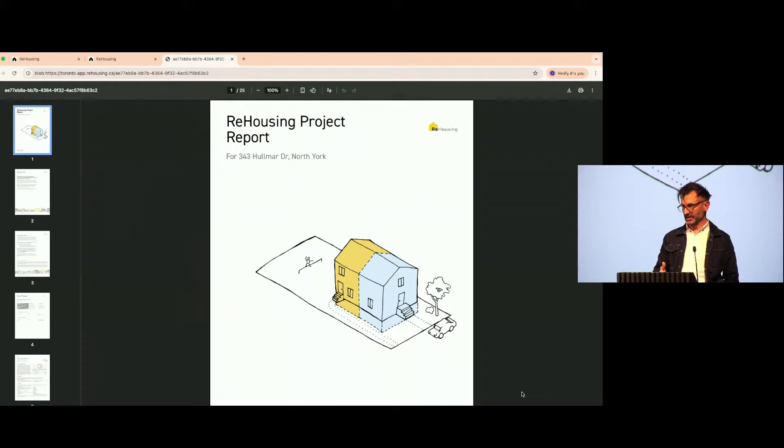So the report includes data about your house, provided by the system, and shows you the cost analysis. I won't repeat all of these since you saw them on the platform a second ago. In addition, we have a series of step-by-step processes describing how to hire a designer, et cetera. Financing options are also described, I think you get the picture.

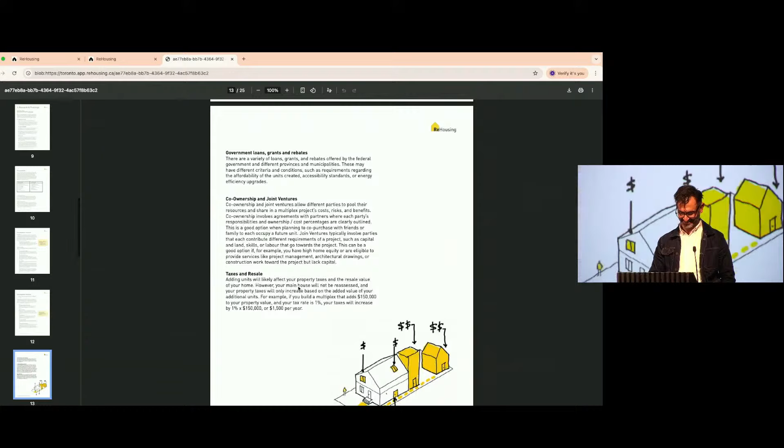And lastly, things like building your team, how to go through the design and approvals process, and construction. There are a lot of pages, so I'm going to stop scrolling now. In any case, this is the end of the tool presentation.